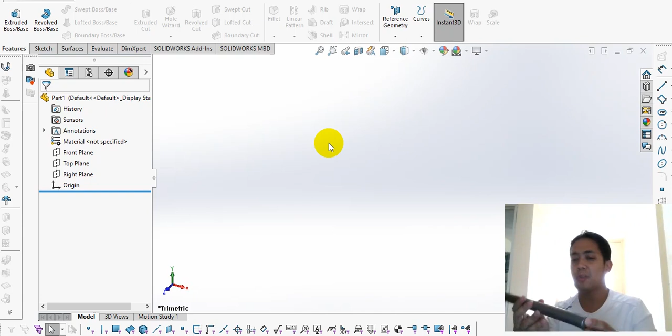Based on our last concept phase, one of the things that we've talked about is that we're gonna use an angle bar. The width is 38 millimeter and the thickness is about 4.5 millimeter. I also decided to use a 1-inch CRS. Now the reason why I use CRS is because it is completely round.

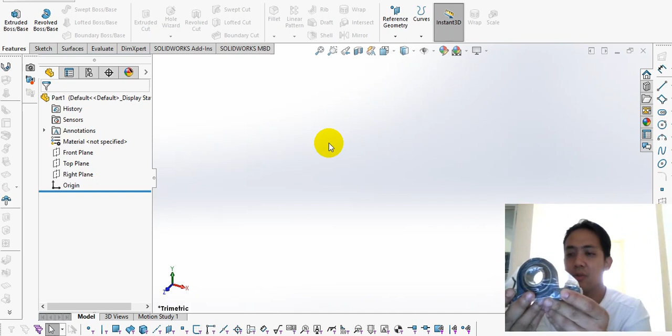There's many kinds of shafting. There is one that is hot rolled and they're not really round, they're a bit oblong. I'm gonna use what we call a pillow block bearing. This is how it looks like. I already got two of these. So if you buy a CRS that is 1-inch, it can fit perfectly here.

Their fit is so perfect that if you have some burrs here, or if your shaft is really dirty with a lot of dust, you're not able to put it in. Fits perfectly. So I haven't done any CAD work for this project yet. I really made sure that this is going to be as authentic as possible.

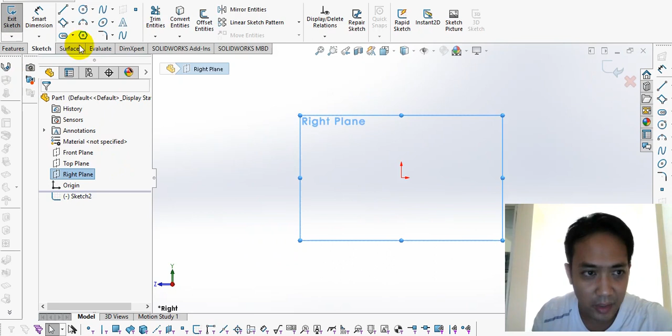So I don't know how long it's gonna take to design this sheet metal bender, but I'll try to do my best. So I will start with the static portion of the bender. So I'll just get my right plane and I begin to sketch the section of the angle bar. So you notice that I did not put the section right smack at the center.

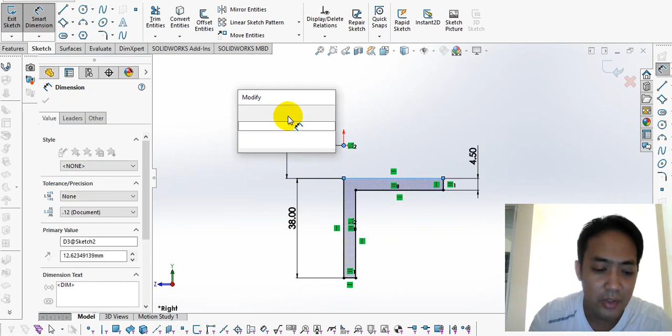It is only constrained here, so I cannot move it sideways, only upwards. There's a reason for that, because let's say this is 15. Because if this is the rotation of the shaft, right? Yeah, if this is the shaft, let's say that's 25.4 mm. And then if my stationary angle bar is like that, it's gonna interfere with the shaft.

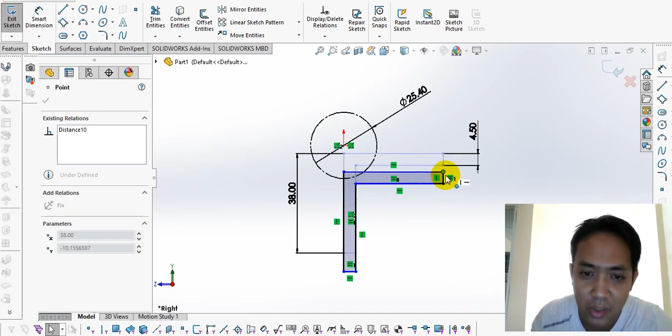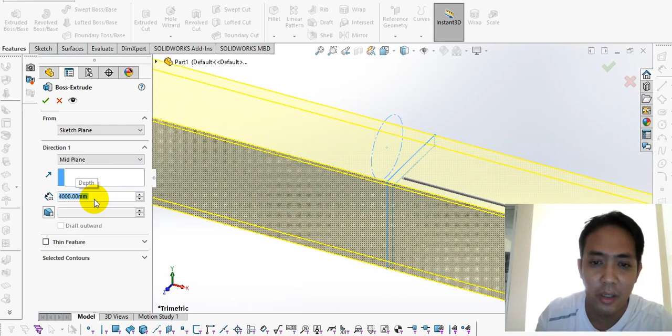That's why I have to place my stationary angle bar, I need to offset it so that it will not interfere with the shaft. Maybe, yeah, I guess 15 mm is okay. So let's exit that and try to extrude this. So maybe I'm comfortable with 400 mm. I'm looking at my measuring tape now and looking at, is 400 okay? Yeah, I guess 400 is okay.

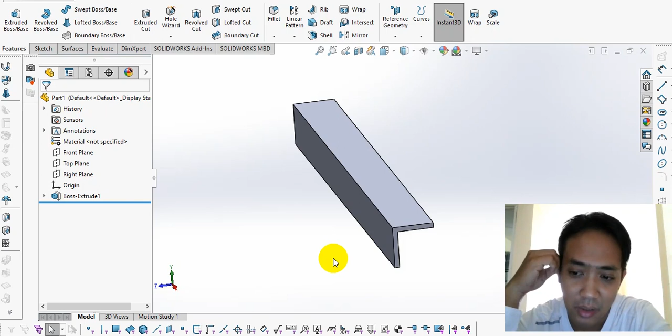So this will be our stationary component. I don't plan to do any stress calculations for this one because I think it's gonna be complicated when I try to solve it by hand. The thickest sheet metal that I would probably bend is maybe around 1 millimeter. So if I have material that is much bigger than 1 mm, like for instance this one, 4.5, maybe, I'm saying maybe because we don't know, but hopefully it is more than enough strength so that this will not bend or deform while doing the bending action.

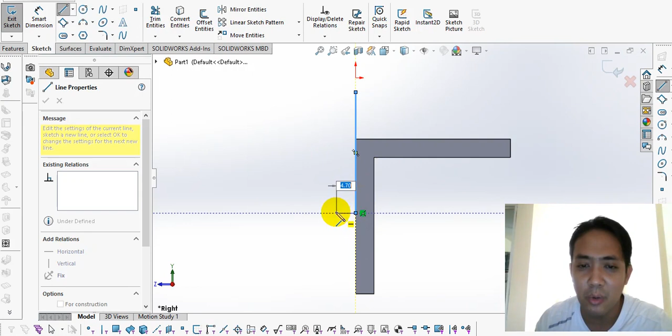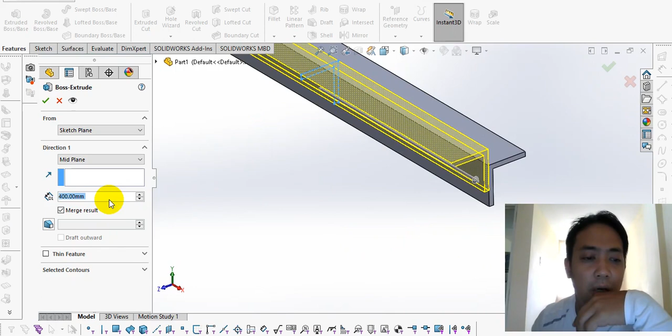So this is the piece that will be rotating. Now you'll be wondering, how come I am making the moving piece, which is a separate part, in the same part model? So the reason for that is that I'm using a technique called bodies technique. Let's say I extrude that at maybe 400. Untick this merge result. When you accept it, it's not gonna be merged with your current solid. So if you try to look at the cross section, it's completely separated.

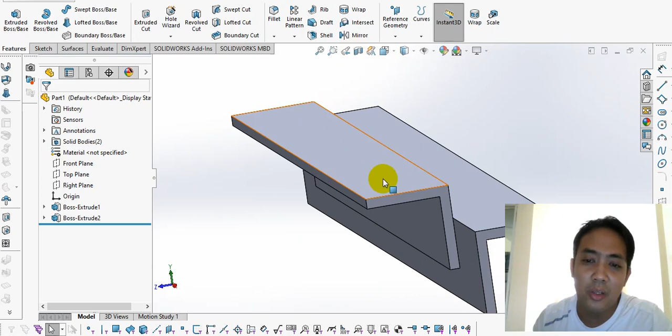So later on, I will show you how to actually create this into a separate part. And then, of course, the shaft will be attached here like this. And then, let's say 25.4 mm, let's say 100 mm. It's too long, maybe 50. Unmerge. So it's gonna be like that.

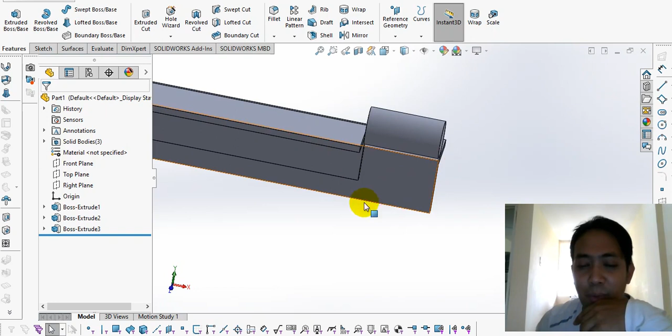Where will we place the bearing? Will it be here or on this side? I guess it has to be on this area here, because if you're gonna put it here, then it will interfere with this area. Maybe we can color code it para hindi siya confusing. So sometimes you want to do this to color code it so that you know the parts that are moving or rotating or fixed. I like green. So let's try to use green. Yan.

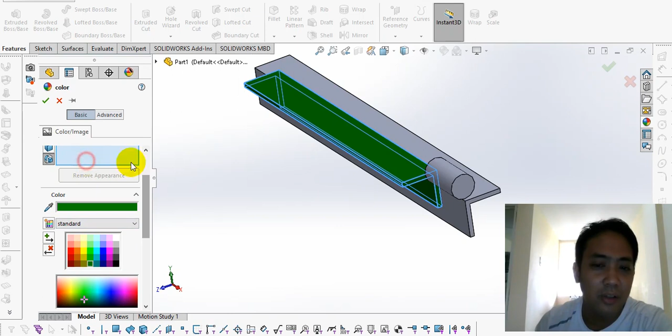So the green ones are moving and the gray one is the stationary. Yeah. So I don't know about this. Maybe it's not a good idea. So I set this as 400, right? And then this is 400. So there are two independent parameters.

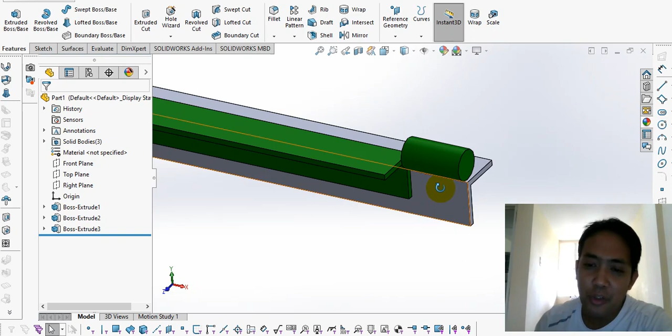So what I've discovered in designing is sometimes you want to have one parameter dependent on another parameter. For instance, if you just want to maintain a distance between this surface and that surface, and then we want to maintain it constantly, instead of setting this length, we can set its offset distance here. Example, offset from surface of this surface.

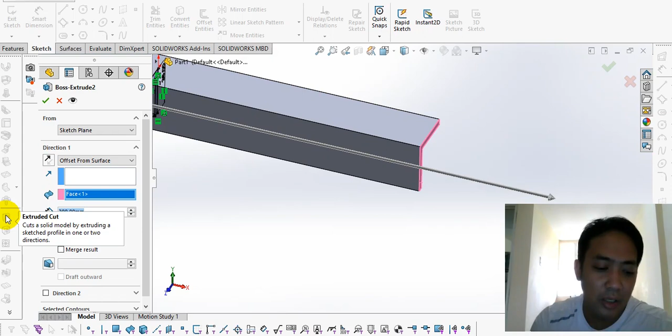Yan. And then let's say, ilalagay ko dyan, let's say 20 mm. So it will set it like this all the time. Then I just have to do it on the other side. The same thing, offset from surface 20 mm. Check. There. So it's gonna be like that.

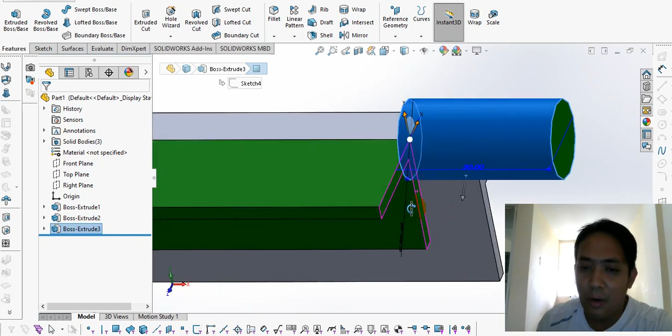I'm not very happy with this kind of connection kasi this green thing will be welded. What we can do is we can actually cut this and then, parang expand this on that side. So edit this and you can place direction 2. Let's say I'm okay siguro with 20 mm.

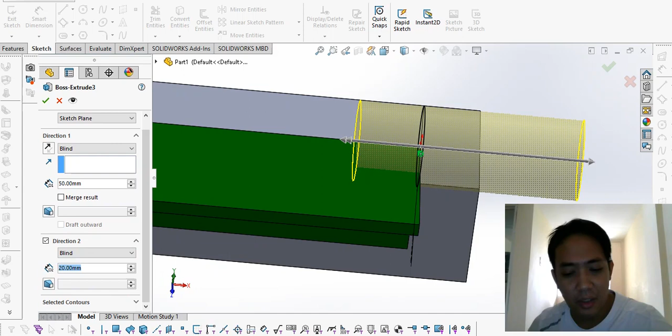It's gonna be welded there with a 20 mm weld bead. Maybe it's okay, maybe it's strong enough. Sige, let's decide na 30 na lang. So it should be strong enough. Again, it's not merged. What you have now is that karon siya ng interference here. You can just simply cut this, I guess. You can do cut extrude just like this. So this is just gonna be a rectangle.

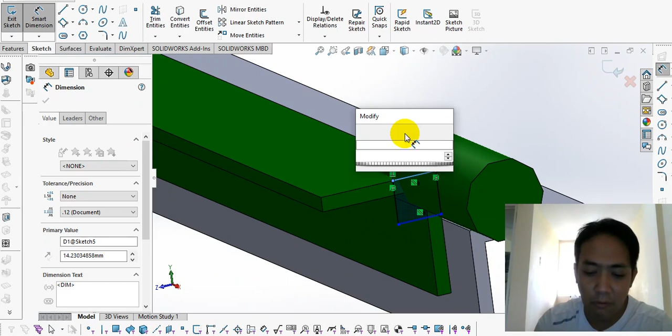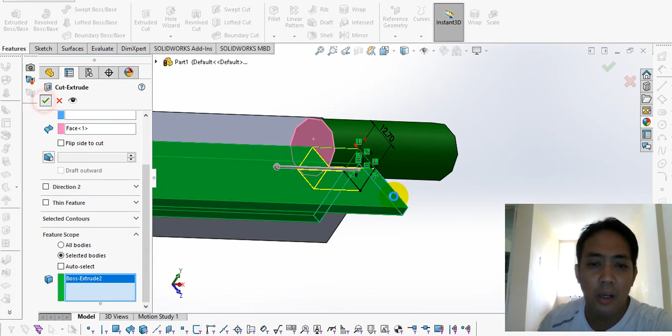Now I know that this has to be 12.7 because the shafting is 1 inch, which is 25.4, and half an inch is 12.7. So this is the cut extrude. Again, I'm gonna do it up to surface of this so that it'll just follow wherever the shaft goes. And then sa feature scope, I untick this to make sure that it will only cut this angle bar and not the shaft.

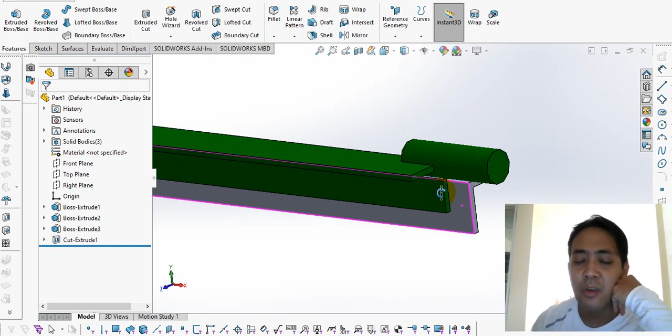Why did I decide to cut it like this? Because this is just a simple straight cut. I can cut that by a grinder. And I can cut this bottom area with a grinder as well. So right there, I already considered manufacturing effort or how am I going to fabricate this. So, yeah, I keep on thinking about this.

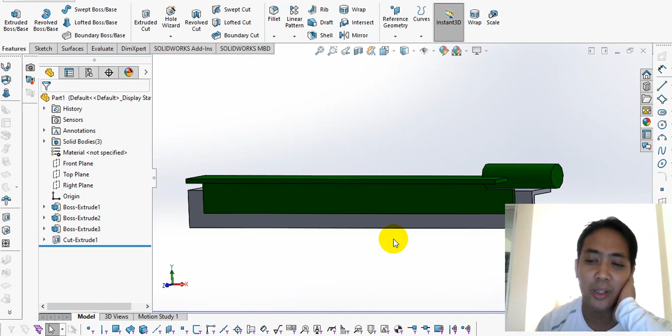In reality, guys, whenever you design, it's not like this. Kasi this one is like a, you know, when people play games and then they video it, playthrough. So this is like a playthrough of design. I haven't seen a video like this in YouTube. That's why I'm making one. I think that it will be useful for our students or whoever wants to do actual design. I'm actually just stalling because I keep on thinking about this.

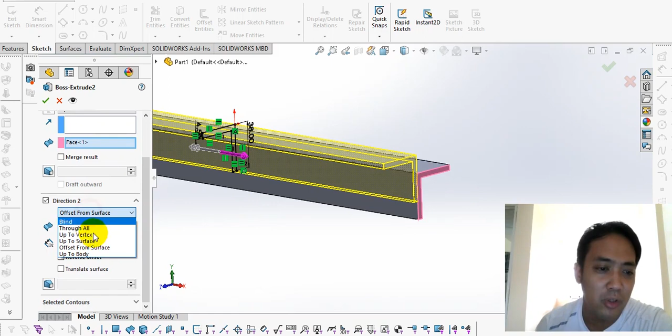I think we don't need this gap anymore. Probably we don't, but I'm not sure. But let's try. So this is the thing about design. Things could actually change. Instead of offset from surface, I'm just gonna do up to surface so that it's like right smack at the surface. It's the same with this one, up to surface. But that's on the other side. So it's gonna be like that. So I will just mirror that later. Let's focus on one side.

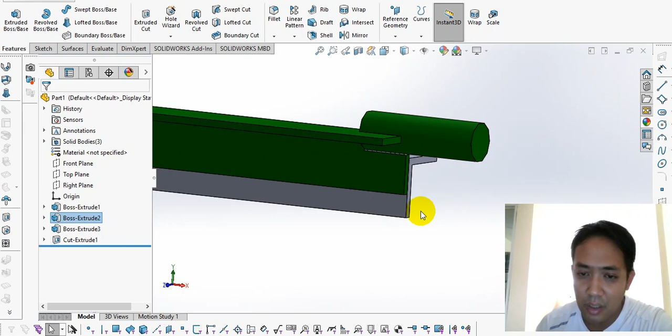So if we're gonna do it like this, this is the stationary component again, and this is the rotating. We could probably put the bearing right here, and it's not gonna interfere with any other elements. So this is 50 mm if I'm not mistaken. So the question is, will 50 mm be enough for our bearing? So you could just model the bearing. So to do that, in most bearings, you need to get its H. I don't know the H of this, but I will pause the video first and I will download a data sheet for this particular bearing.